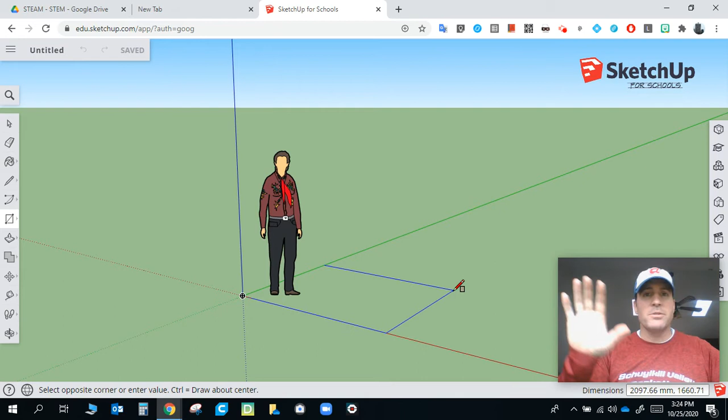First thing we're going to do in this brand new file is not delete the guy, but we will do that soon. First I'm going to go to the rectangle tool and take it to the origin. This is a familiar step since we've done this before a number of times. At the origin, we click and release, then drag to the right and take our hand off the mouse or touchpad. Now we're going to type the dimensions of this rectangle.

This rectangle is actually going to be a square, so we're going to type 46, 46. It's 46 by 46. If you look right under my picture, that fun-filled screen where I am, you'll see 46, 46. We talked about this before - if I move my mouse, those numbers go away. So again, 46, 46, and then I hit enter, and that makes my rectangle.

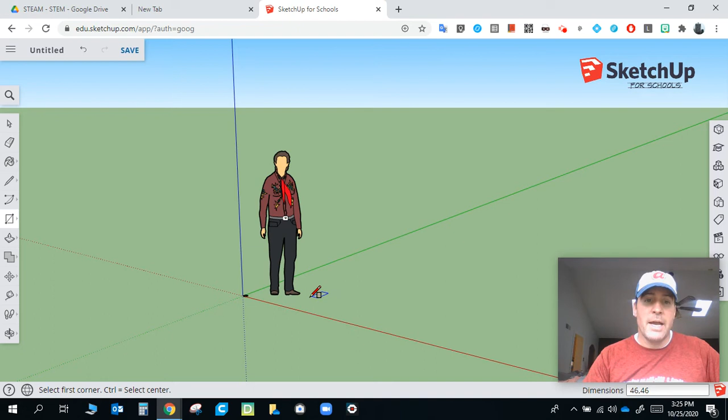You can see right down in the bottom of my screen, by the origin, a tiny little blob - that is my rectangle. Now if I go to the view tool and grab that zoom tool, I can put it on there and do my two-finger pull. I can also use any other tool and do that two-finger drag down on my screen, and you can see it zoomed in as well.

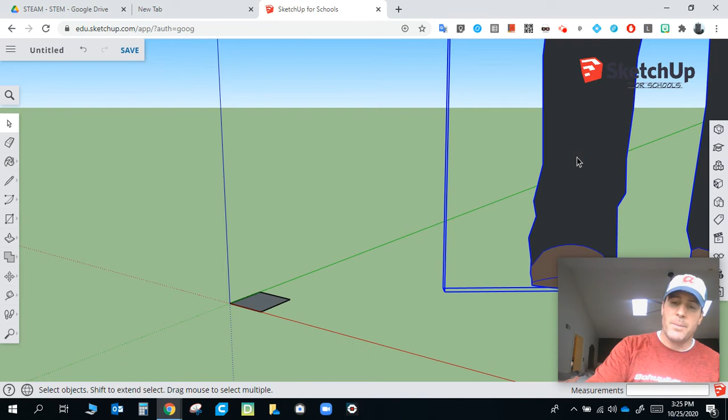Now I wanted my selection tool, which is why I grabbed it. With the selection tool, I'm going to click on the guy and hit backspace. I can see that looks like about the size of a keychain that we would expect to see when we compare it to that foot that we just saw.

So once we've got this, I'm going to do one more thing, and that is adjust my view. If you've got a mouse, you can click and hold your mouse wheel to get that orbit tool. I don't - well, I do, but I'm going to pretend I don't. I'm going to select the orbit tool from the view menu, which is the bottom of those menus, the bottom tool menu. Once we click on that, it's the top tool in that bottom tool menu.

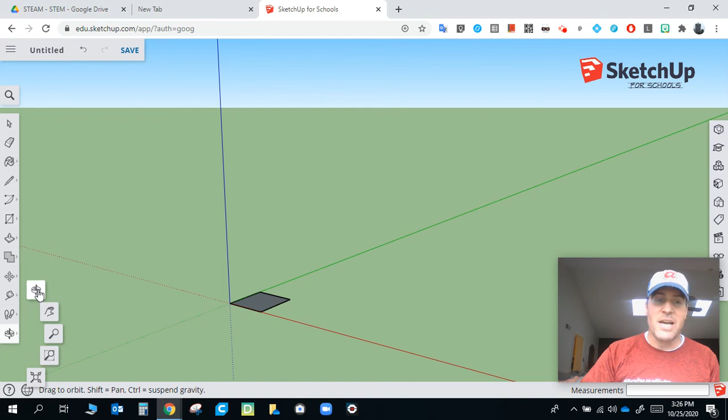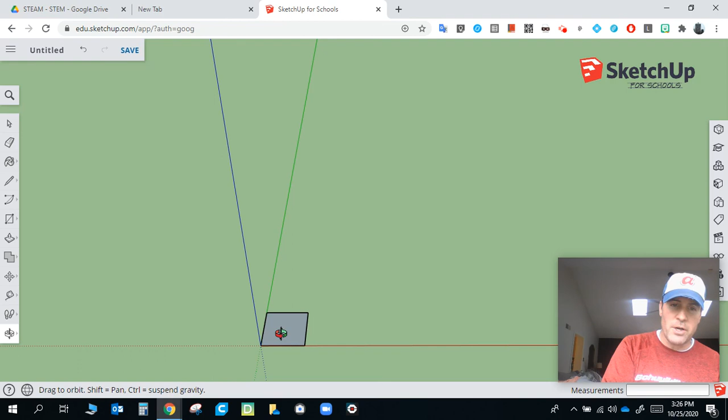I'm going to put my mouse a little bit to the left and a little bit above my object. I'll click and hold, drag down and to the right to get that view a little more on top. I'm going to zoom in a little bit too, by putting my tool on my object and bringing that two-finger drag down. I'm going to go to my pan tool, the second tool, just to center this up a little better. And now I'm done with the first step of this process.

So great job. Can't wait to see what you do next.